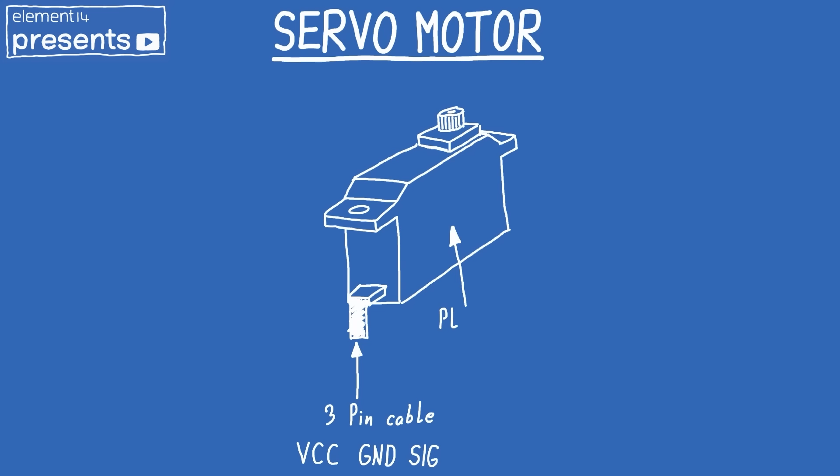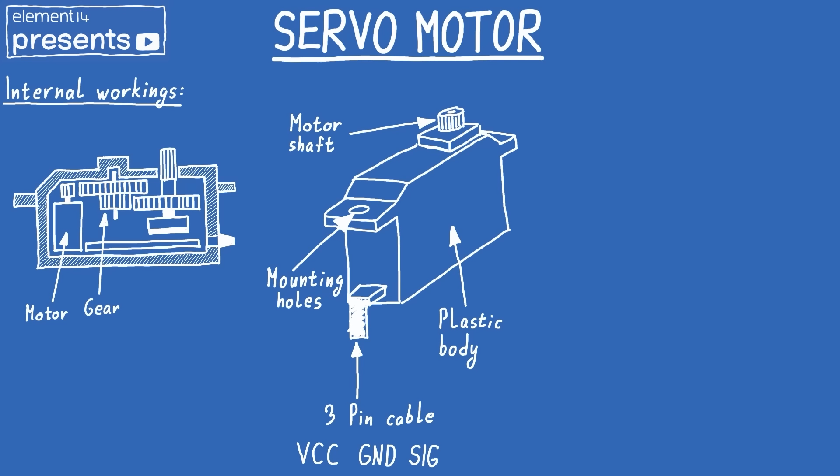So this is a drawing of a standard hobby servo motor that you can see around. It has 3 pins, power, ground and signal. The ones we will be using have a plastic body, 2 mounting holes and a motor shaft. Let's take a look at the inner workings of a servo. So inside it's a normal DC motor with a big gear reduction, and on the output shaft of the gear there is a potentiometer which measures the angle, and a PCB with a controller where we send it the signal and it tries keeping that value.

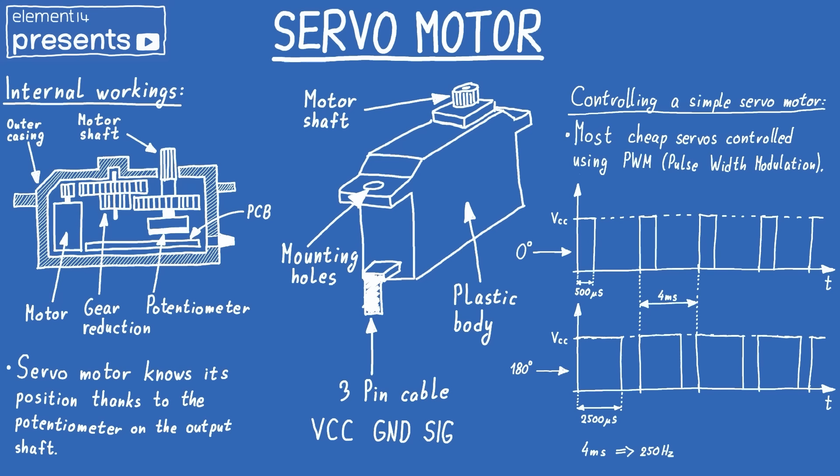Now there are other fancy servos that have RS485 communication or something else, but these servos that we will be using are controlled using what's called PWM or pulse width modulation. So for these servos, we tend to go around 200 to 300 Hz, for example, and for 0 degrees we want a pulse width of 500 microseconds, and for 180 degrees, we want 2500 microseconds, and that's how we control a servo motor.

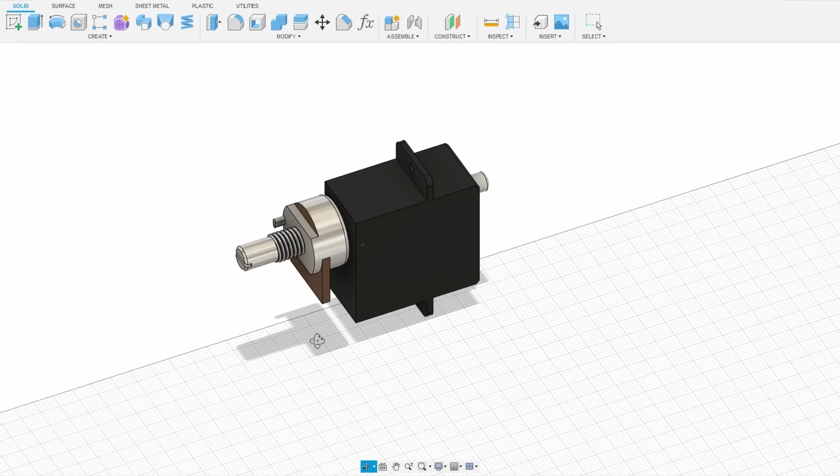Okay, so let's take a look at how we will design the module that holds the servo and the potentiometer. First off, I began by measuring the actual servo and making a model out of it. The next thing we need to do is place the potentiometer, which you can see here. So as mentioned before, we want both the shaft of the motor and the potentiometer to be on the same axis, so that we can use that axis as the joint of the robot.

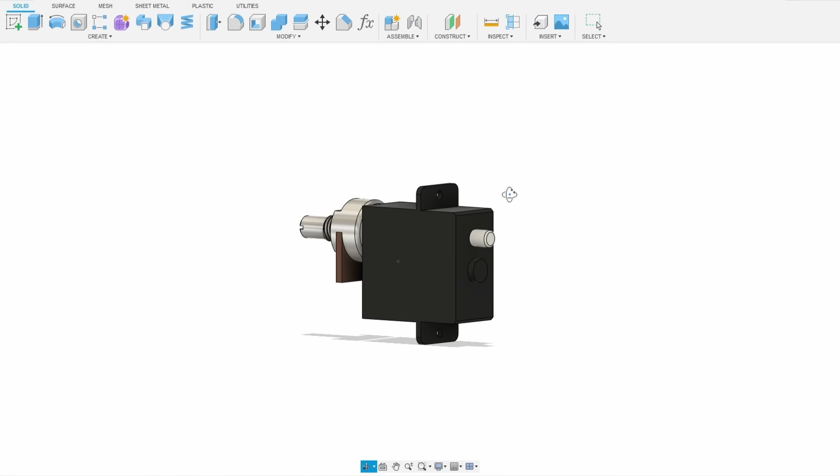What we need to do now is design a 3D printed case that can mount both the servo and the potentiometer. The servo motor mounts using these 2 holes here and here, while the potentiometer mounts just with a nut here. So this is the box I designed that houses both of them. I tried making it as small as possible, but I still wanted it to be aesthetically pleasing, so it's not just a skeleton box but an actual box. And on top of that I added a lid.

Okay, now that you've seen the CAD of the module, let's assemble it. First things first, we need to insert the 4 M3 nuts here and cut the threads here. These threads aren't necessary, but I like cutting them to get a more reliable connection. First thing you want to do is insert your potentiometer. I already soldered the wires. Okay, now that that's done, the next thing is to insert the servo motor.

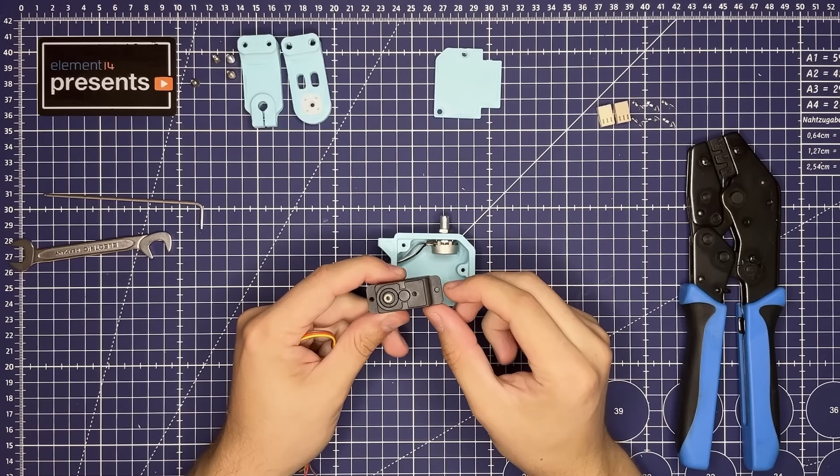The holes on the servo motor are 2.5 millimeters, which is perfect for M3 screws, so I cut the threads again. To insert the servo, you need to fold this cable like this here, a little bit less like this. The next thing we need to do is attach the servo using the 2 screws. Don't tighten it too much so you don't strip the threads. And it's a pretty snug fit, so the servo won't go anywhere.

And the last thing when it comes to the mechanical assembly is to add the cover. Okay, so that's the finished module. Next thing we need to do is crimp the connectors. I'll speed this part up.

Okay, the last thing to do is to actually put the pins into the connectors. This is the board, the final board that we will be using for controlling everything. This side here is for the potentiometers, and this side here is for the servo motor. So the outside pin, as it goes like this, is for the ground pin, which is the black pin here. Then in the middle is the 3.3 volts, which is the gray wire.

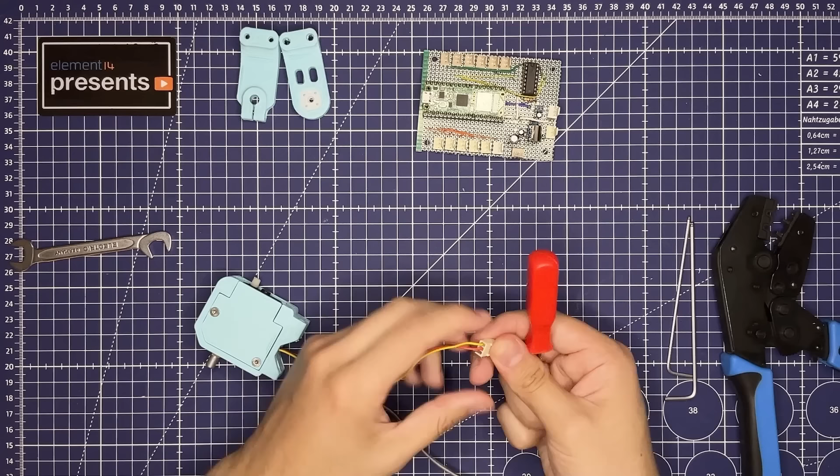And in the end we have the signal wire, which is the middle contact, and in my case that's the white wire. And it clicked into place. That connector is done. Now let's go to the servo connector. The outside pin is again the ground, so that's the brown wire here. That clicked into place. The middle is the power for the servo. There you go. And the last one is the signal wire. And it clicked all into place. So this is a completely finished module now.

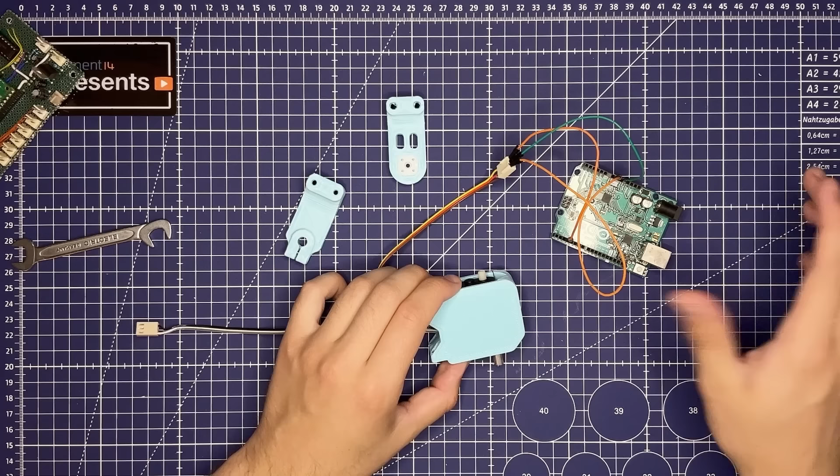Let's take a look at another thing, and that's how do we actually attach these arms to the module. To do that, we actually need to use a microcontroller or a function generator. So there's a program on the Arduino Uno running which just turns the motor to 0 degrees, then to 180, and then back to 90. 180 and then 90. So why is that important? It's important so we actually center the servo motor, so we know that the center point is 90 degrees.

So this is the servo arm. It has the servo plate that came with the servo motor. I just glued it into place. Everything is exactly 24 millimeters wide. They're the same. So the easiest way to do this is place both on the table. Just push the servo arm onto the module. Okay, and that's how you get the arm attached.

And the other one is for the potentiometer. So the potentiometer can't go a full turn, but if you place it like this, you can see that you can get 90 degrees both ways. So that's what we're gonna go. So we're gonna attach it like this. It has a little stop so it doesn't go too far. And to tighten it, you just use a small screw right here, and that would be it. So now if we restart the Arduino, 0, 180, 90. Okay, so you've seen how the segment goes together.

Let's now test it out. Here I have a setup for actually recording the movements. It's calibrating now, finding its minimum and maximum position. And now if we move it in a particular direction, like this, and leave it, after the recording session, it will go ahead and repeat that movement. So if we do this for all of the joints on the robot arm, it will essentially remember what it did, and it will just repeat that.

Let's take another look when it comes to the joint design. So this is the joint we've just tested. We're gonna have 3 of them. So we have the servo motor and the potentiometer on the same axis. But what about the base joint and the last joint? They're kind of different in their construction, and we can't have arms on both sides for the joint to be stable. We need some kind of a bearing assembly to actually hold everything together to keep it stable.

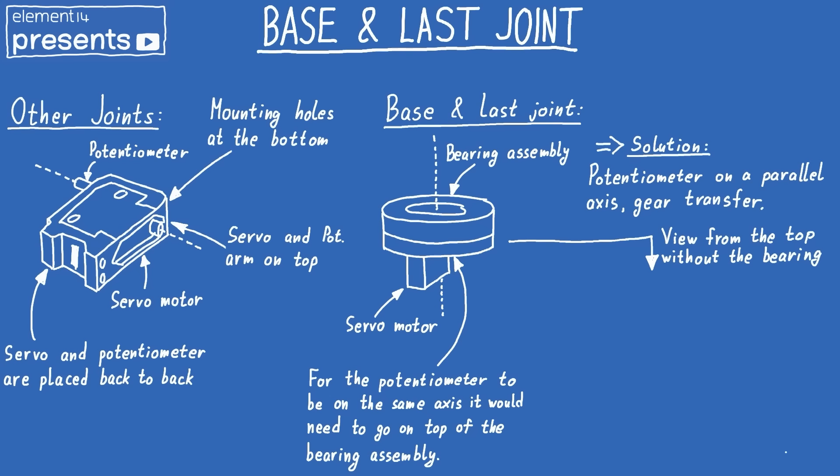So another issue here is that we can't have a potentiometer on the same axis. We need to have it on a parallel axis to the servo motor, and the way to transfer that movement is through gears. Either that, or we need to have a wraparound arm to hold the potentiometer, but then we run into different issues, so we're gonna go this route.

Okay, so now you've seen how the modules look. There's one thing we need to address, and that's the last joint and the base joint. So the thing is, for these joints, especially on our arm, every single axis will be supported both by the motor shaft and the potentiometer shaft. For example, for this arm, the last joint was only constrained by the motor shaft of this servo, and that's too wobbly and it isn't strong.

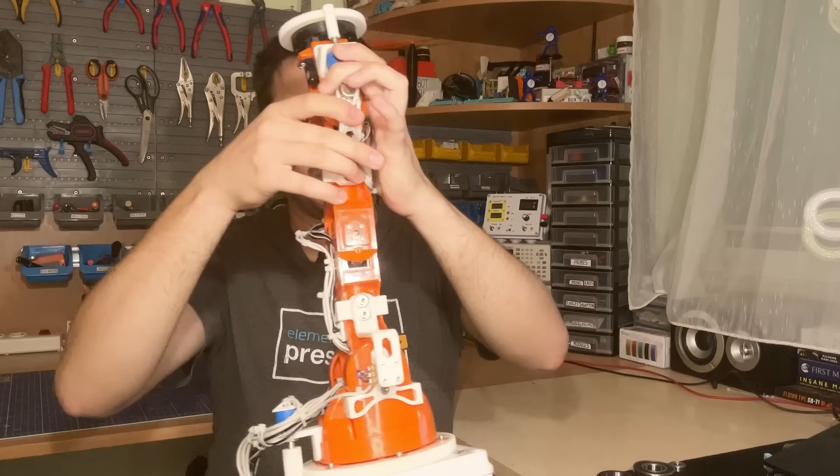I've upgraded this by adding a bearing on the top. That's something I couldn't do down here because I would need a much bigger and more expensive bearing. So the proper way to go would be to use bearings. This is how bearings look.

They come in all different shapes and sizes, but the point of this arm was to keep it as low cost as possible. And again, this isn't a precision robot arm for doing precise movement. This is more for experimenting and learning. So I decided, let's see how hard it would be to actually make our own bearings with something that everyone has seen in their life and has access to, and that's marbles.

So let's first take a look at how a bearing works and go from there. When we look at the bearing, we can see the inner and outer ring. The point of the bearing is that the inner and outer ring can spin at different speeds with minimal friction. So we have the inner and outer ring, you can see the cross sections here, and I'm here describing how a ball bearing works. So it has little metal balls inside in a ball cage that just roll around, and that's what keeps everything constrained.

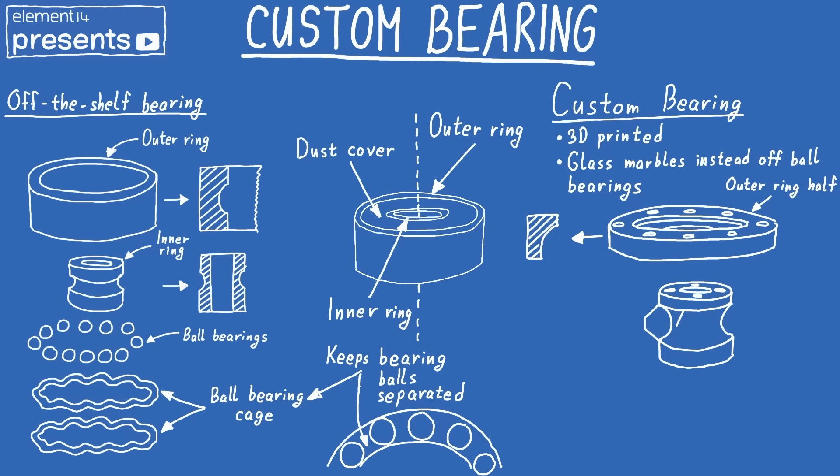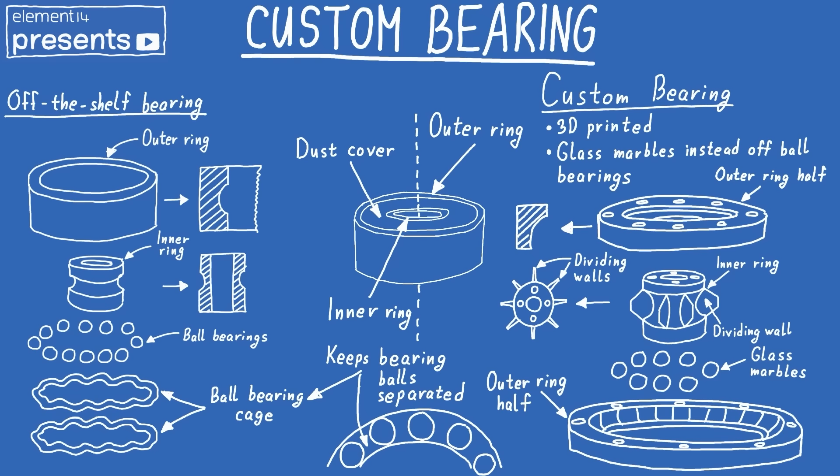For our custom bearing, I want it to be 3D printed, and instead of metal balls, I'll be using marbles since they're cheap and we can find them literally anywhere. But instead of having the cage, my inner ring will have small separating walls so that the marbles don't rub against each other and cause additional friction. And they will be sandwiched between two halves of an outer ring. So that's the idea for my bearing design.

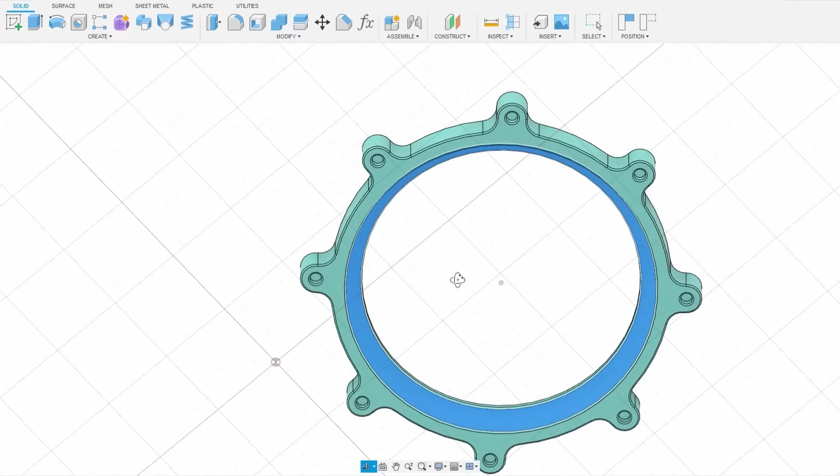Okay, now that you've seen the drawing of the bearing, let's look at the design itself. I'll begin with the part of the outer ring. As you can see, it has this curved surface here, which is a bit over the diameter of the marble itself that we're going to be using. Besides that, we have the lower half. The lower half also has the attachment points to attach the whole robot to a base, as well as attachment points for the servomotor assembly. This is just a hole to insert an M3 nut inside.

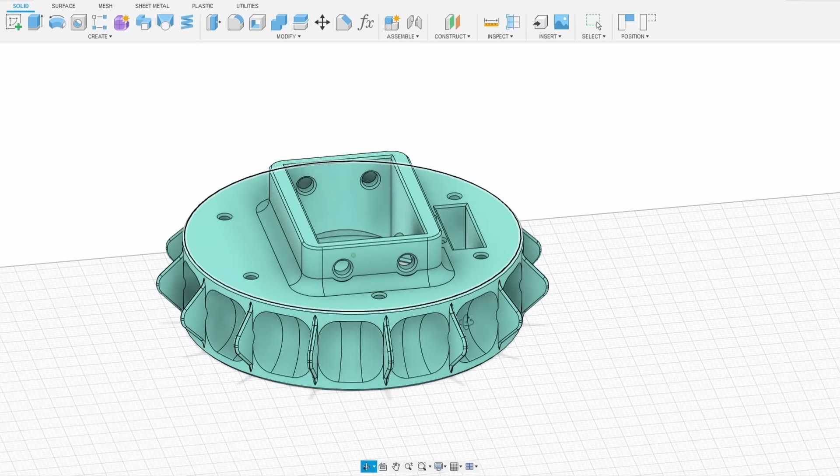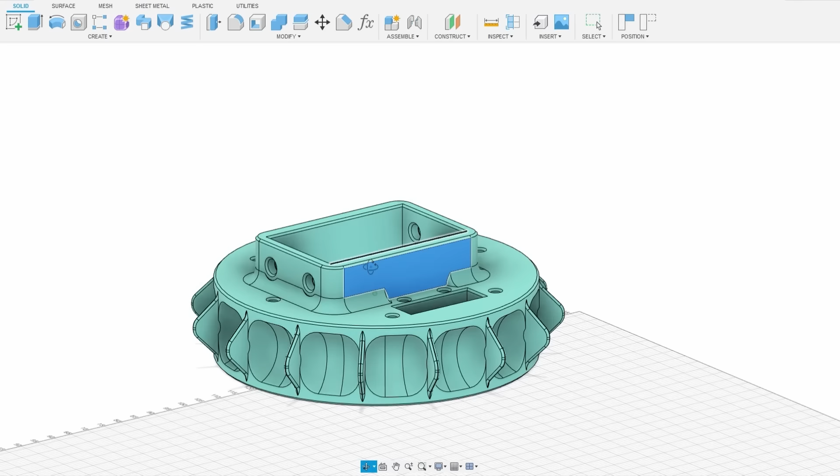And the inner ring is the interesting one. So each one of these sections is supposed to get a marble, and these here are the divider walls. The point of them is to just not let the marbles touch each other, because when marbles start rubbing one against another, that's where you get the friction and the bearing won't work properly. Besides that, on the top of this inner ring, we have the section where the joint that you've already seen screws into place. And on the bottom, we have the holes for attaching the servomotor plate.

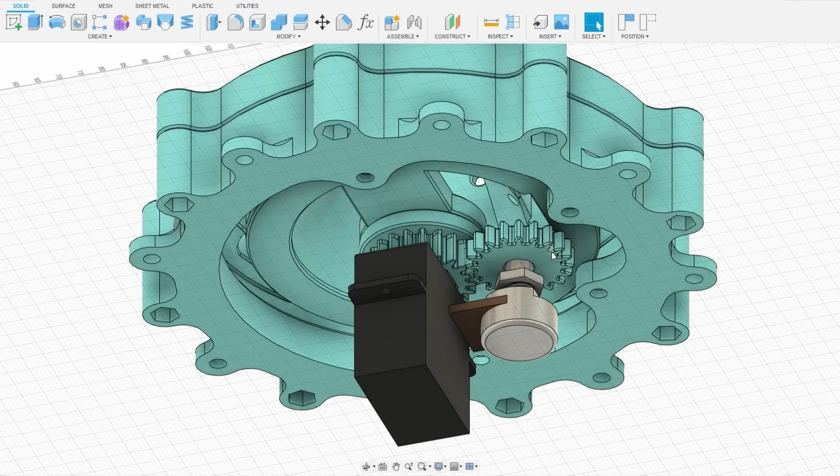So together, this looks like this. And then if we add the servomotor and the potentiometer, they go here like this. Of course, we need a way to attach them to the construction up there. So to do this, the servo is again going through the plate and attaches to the inner ring over this gear, and the potentiometer has the same gear, and all of that is held together by this servo mount. And this is how the whole assembly looks.

The same thing is done for the last joint assembly that you can see. It's just in a much smaller package because we don't need a bearing that big, and we also don't need a hole to run all of the cables through down to the box. Okay, so now that you have seen the concept and the design of the big bearing, let's see how it goes together. So it goes together using these 8 M3 20 screws.

So the first thing is we need to get the base. The base is the one with all of the M3 nuts already inserted. I've already done that off camera, as you can see. These 4 holes are for mounting the servo on the bottom, and these 8 holes are for actually holding the bearing together. And these 8 holes here are for mounting the robot to the box, to a stand, or to whatever else. So the first thing that we need to do is actually put in the bearings, but we start by putting this thing in the middle.

This bearing, as you've seen previously, uses 15 marbles. It was a bit of trial and error to get the tolerances right for the bearing to spin freely. So that's why we have this adapter ring right here.

Okay, so everything is in now. Next goes the spacer. This spacer is 2mm thick. And on top of that we have the holding outer ring, so let's just screw it down. Okay, and just tightening the last screw. And with that, our bearing is complete.

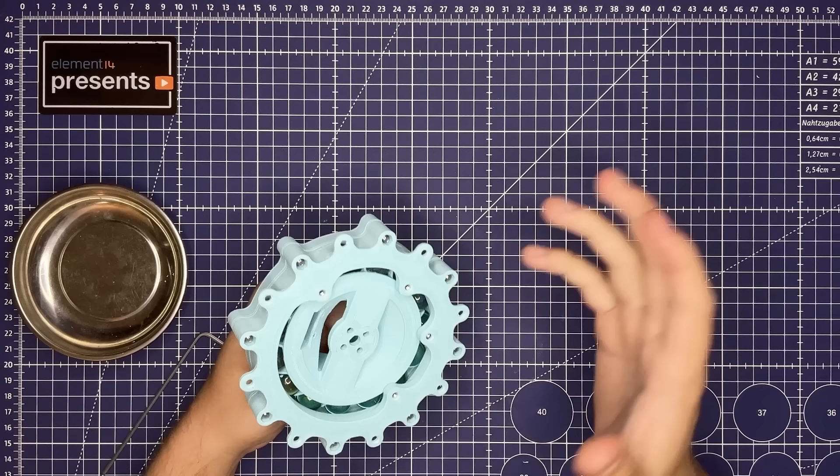As you can see, we can spin it around freely. It doesn't have to spin freely as a normal bearing. The only thing it's supposed to do is when it's loaded to actually allow the servo to spin the whole base of the robot, which it will.

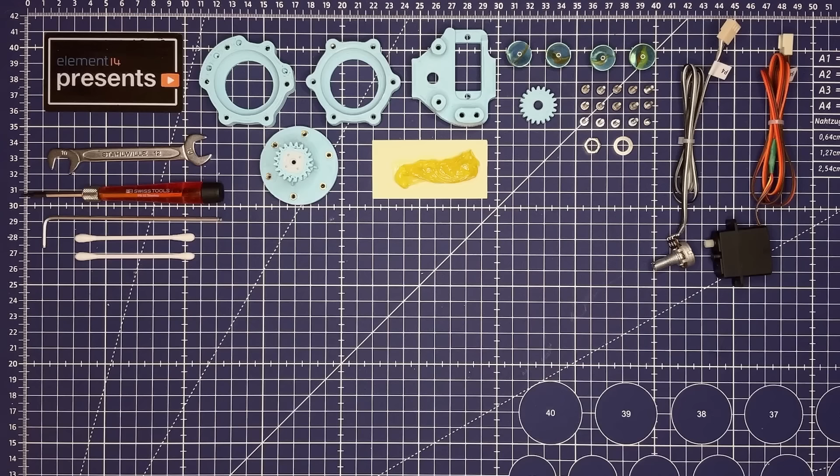You've seen how to assemble the middle modules, so now let's assemble the top module. One thing to note here is that I will be using some grease. It's not mandatory, but due to the bad tolerances of generally 3D printing and the marbles, I found that it works much better if you actually use some grease. So let's start by applying some grease using Q-tips. This is just some random automotive grease. Anything will work pretty much.

Okay, so now we're done with that. Now it's time to assemble it. This here is the inner ring, let's call it that, and it's also the mounting plate for our gripper and things like that. This is the top plate, so to assemble it, this goes over here like this. And now we need to put the marbles into place. We don't need to put grease on the marbles, they'll get grease when we push them in. The tolerances are pretty tight, so they will pretty much click into place, as you will hear now.

There you go. Next thing to do is to actually put the other part of the outer ring to encase the whole bearing. So just make sure to align these holes. The top part already has inserted M3 nuts here. So align it like that.

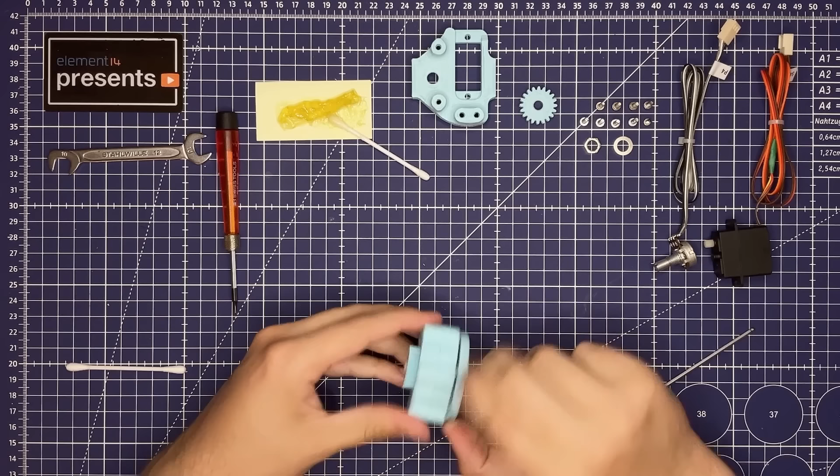Okay, now with that assembled, just spin the bearing around to get the grease on the marbles, and you will see that it will start spinning pretty freely. And also when you put in the motor, it will straighten the axis and make it spin even more easily. Okay, we can leave that to the side for now.

Now we need to attach the potentiometer and the servo motor to the servo mount. Let's first do the servo. Okay. Make sure that the top of the potentiometer and the gear align. So let's just lift it up a bit, like so. Yeah, that's pretty good. And because the tolerances are pretty tight here, make sure that the gear doesn't touch any of the pillars here. Okay, now we need to use the Arduino Uno as we did for the previous section.

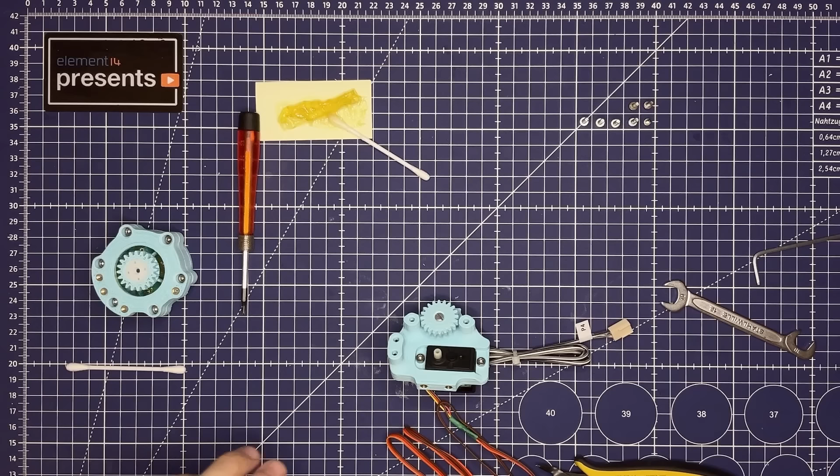We need to center the servo. So let's connect it up real quick. 0, 180, and that's 90 degrees now. Okay, so what we need to do now is actually center this potentiometer. As you can see, we can just put it at something like this. All we need to make sure is that it has 90 degrees this way, which it does, and 90 degrees this way, which it does. Okay, so we leave the potentiometer like this.

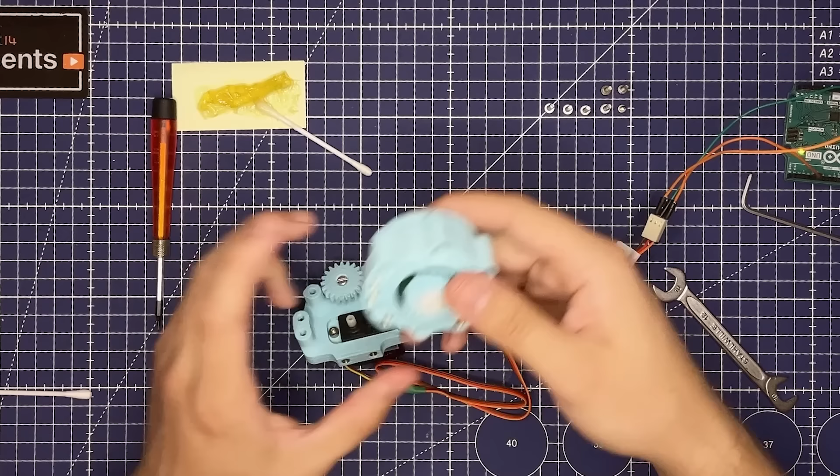Now, the only thing is that we need to align these 4 holes with these pillars here, so we can actually screw it down later. And just get the teething as best as you can. But, I mean, the potentiometer has much more than 180 degree travel, so it won't make a big difference. Okay, and now we just need one last screw, and that's the screw that attaches the servo plate to the servo motor itself. And with that, our top joint is complete.

So that would be it for the whole assembly. The only thing to do now is to actually assemble all of the modules together. They are easily assembled using these holes here, or for example, these holes here on other joint pieces.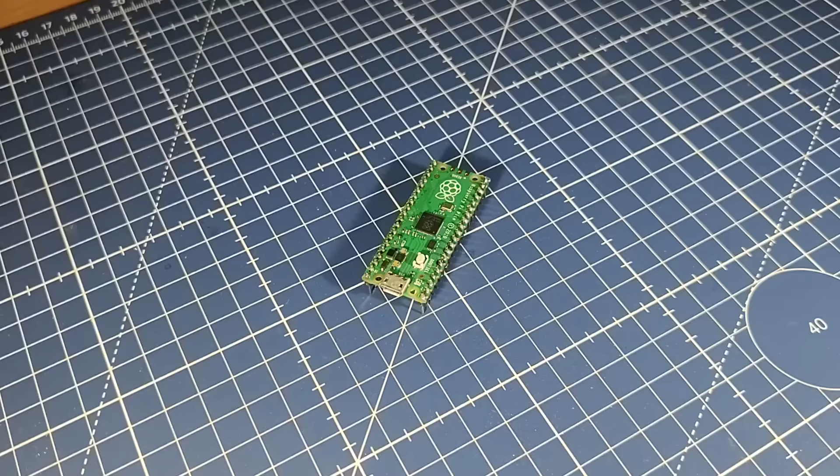That would cover all of the mechanical aspects of the build. Now let's get to the electronics. For now at least, I will be making a low-level controller, so just a hardware controller to run all of the servos. So I won't be doing any fancy stuff like direct or inverse kinematics, things like that. All I want to do is send G-code-like commands to a microcontroller and for it to actually move the servos to the actual angles. I will be going with a Raspberry Pi Pico W microcontroller, so the wireless one.

It's the same microcontroller as the Pico. I just want to have the wireless capability maybe for some future upgrades. Let's take a look at the final schematic. So for the most part, it's just connecting all of the servo motors here on the left to the Pico, as well as all of the potentiometers.

One thing with the Pico is that it only has 3 ADC pins on GPIO 26, 27 and 28, and we want to connect 6 potentiometers to that. So to do that, we're gonna use a multiplexer, the CD4053B by Texas Instruments. So we can literally switch between 2 potentiometers on one single ADC pin.

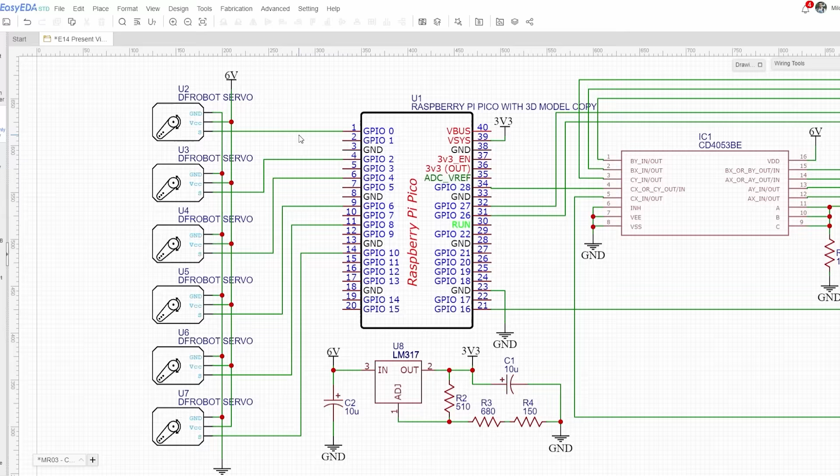So we can do that in software, and for the reading speeds that we're aiming for, this is more than good enough. The servo motors already require power, the 6 volts, and they also require the signal wire. The signal wire needs to be connected to pins 0, 2, 4, 6, 8 and 10. This is because we are using hardware PWM on the Pico, and the PWM on the Pico is separated into slices, and we can control each slice independently. One slice is, for example, GPIO 0 and 1, so we can only use one of those pins the way I did it with the library.

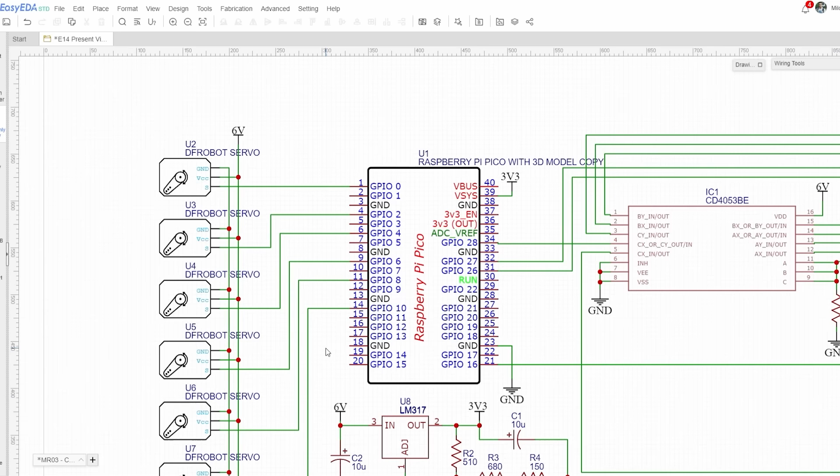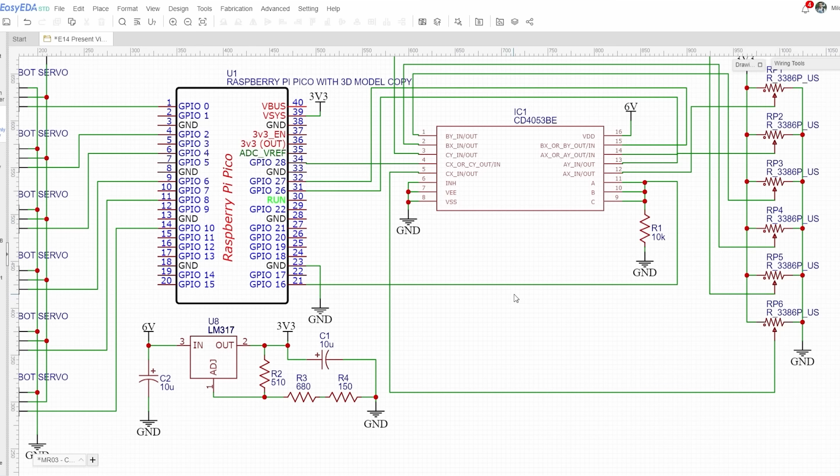So this is how I connected all of the motors. Besides that, we have the power supply. I'm just using an adjustable linear regulator to drop the 6 volts to 3.3 volts. So this would be the end of the schematic, besides me making a mistake and not reading the datasheet, because this was an error I was actually looking for a while and why it didn't work. So this doesn't work, and the simple way to fix this is by adding this piece of circuitry.

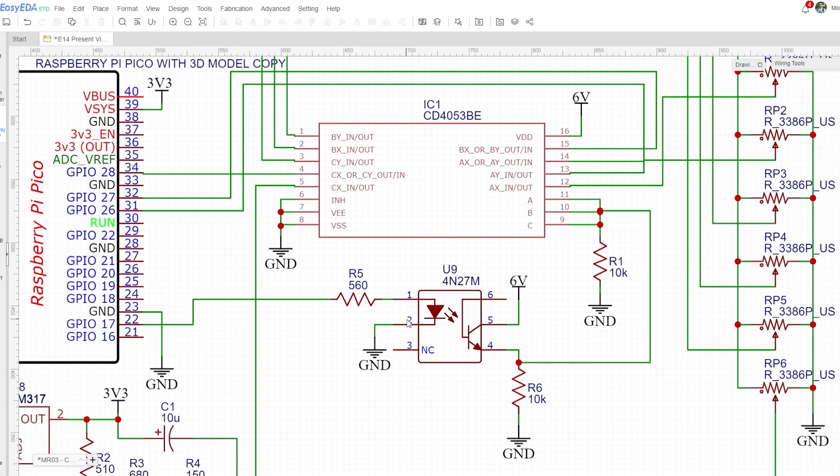If you look at the datasheet for the CD4053BE, the voltage at which we can actually trigger the multiplexer for a 5 volt power supply is over 3.5 volts. So actually trying to do that when we are powered by 6 volts, nothing happened. So we need to step up those 3.3 volts to 6 volts, because we have 6 volts already, to be able to actually trigger the multiplexer. Let's solder this board now and test the robot out.

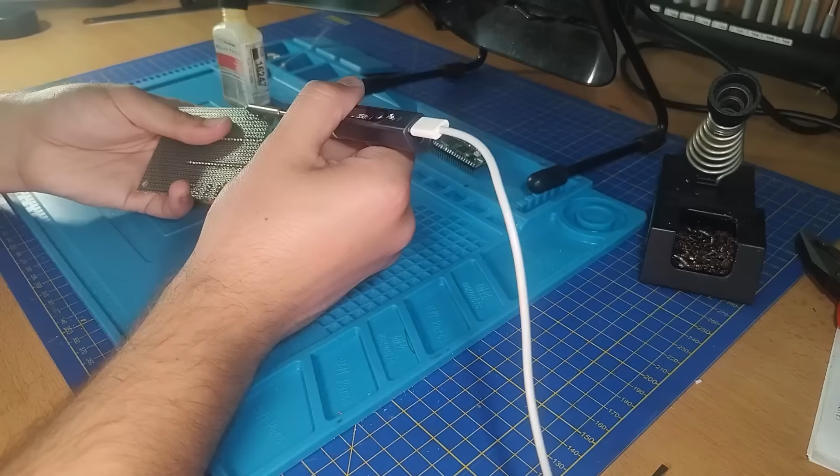Before we test the robot arm, we need to first program it, of course. Let's take a look at the code I will be using. So we will be using 2 libraries, not 3. My first test included the servo library, but I found it didn't work too well with this many servos on the Pico for some reason. So I opted instead to use the RP2040 PWM library, and I'm also going to use the Pico timer interrupt library, as you will see. These are all of the pins I will be using, and these are some of the parameters that you can actually configure for the robot itself, like the minimum pulse width and maximum pulse width for the servos, which is in the datasheets from 500 microseconds to 2500 microseconds for 180 degrees.

So okay, let's jump to the setup function first. The setup function is pretty simple. We just start up the serial, define all of the pins, turn off the relay, which is important so the arm doesn't start going randomly. Make sure that it's actually off, configure the ADC, configure all of the PWM channels, and configure all of the timers. In the loop function, the only thing we are doing is checking if there is some command coming from the serial, and if there is, we are decoding the message. So let's look at that now.

Okay, so this is just the check serial function. It's the default function for just checking if there's some data on the serial data line. So this is when we type into the COM port. That's how we communicate with the Pico. And let's go now to the decode serial message. These are all of the commands I plan on. Some of them I already added, and some of them I will be adding. So for example, C0 is the main command. That's the stop all command. If we see that the robot arm is trying to do something that it probably shouldn't be doing, we just type C0 and it kills the servo and all of the PWM signals, so the robot just stops.

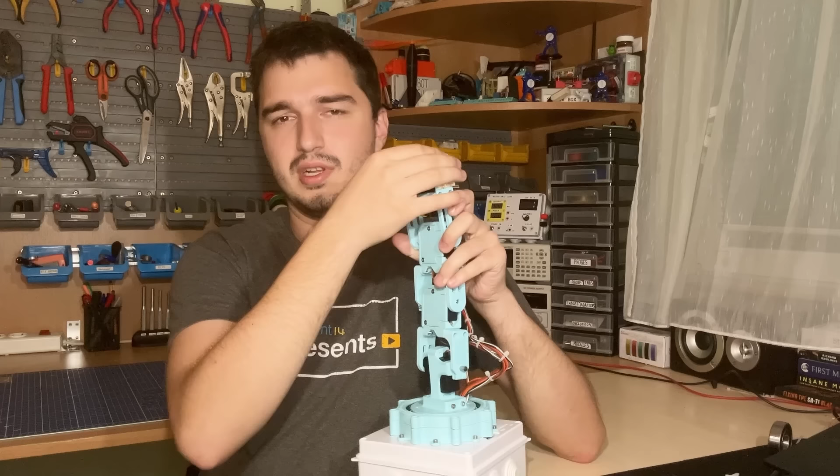I'm really happy with how the arm turned out, but as you can see, one of the segments is a bit different. So during the testing, these segments with these servos turned out to be too weak for an arm this size. The arm would have to be even smaller and lighter, and with this heavy top bearing here, this motor especially couldn't handle that.

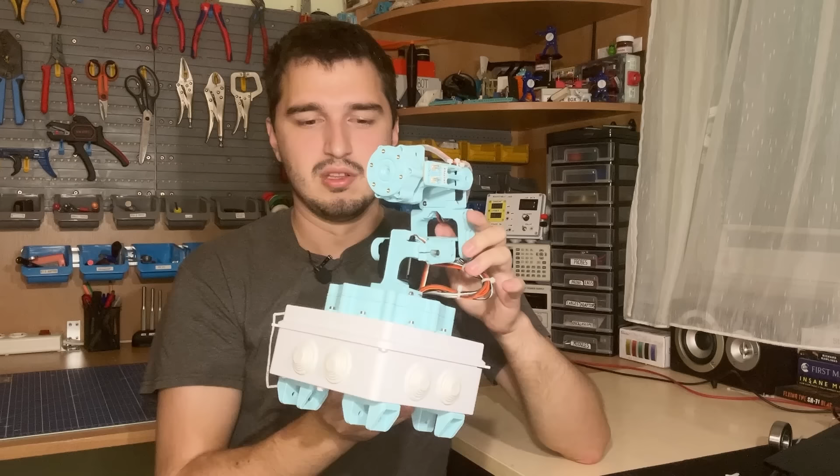So I made a little mount for the standard size servo that actually has a built-in analog feedback, so it worked out pretty good. But honestly, as you will see now during testing, this joint right here could also benefit from a motor swap like this one here, and it wouldn't add too much additional cost, but we could do something about that later. So let's go on and test this robot arm to finish up.

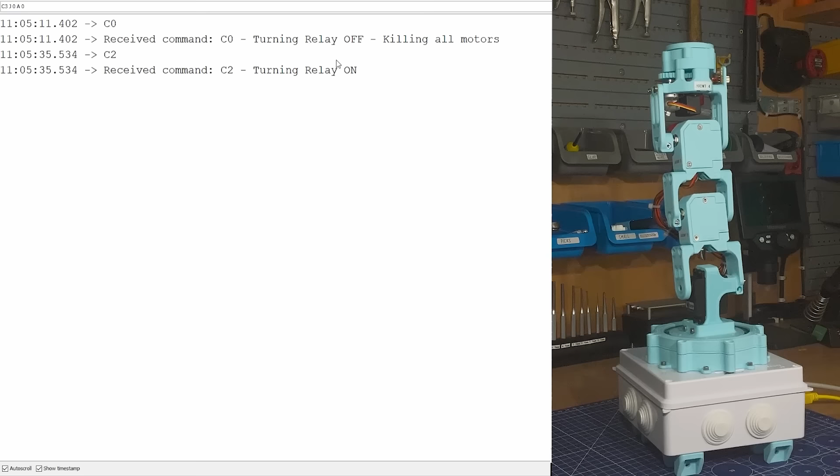So let's just activate the system. So for example, if we want to turn the base by 90 degrees, you can see how slowly it turns now. Or if we go 180. This also relieves a bit of the pressure from some of the motors, since they won't have to handle all of the inertia caused by the upper segments.

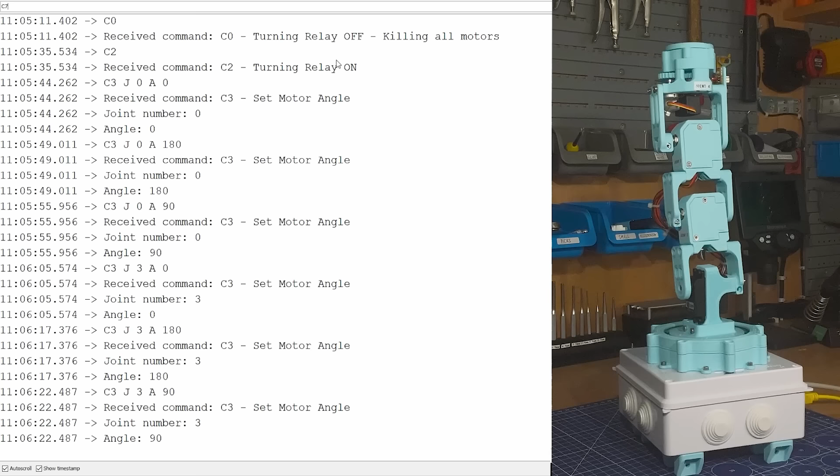So for example, if we look at joint number 3 and put it to 0, you can see that joint 2 can handle that, because the arm didn't just swing it fast, so there wasn't a lot of inertia. Or if we switch it to the other side, you can see the same thing, it works great. Okay, it also works when we do all of the angles at once. So for example, let's do the pose that we did previously. And as you see, it just goes way smoother than it would without the ramp limiter.

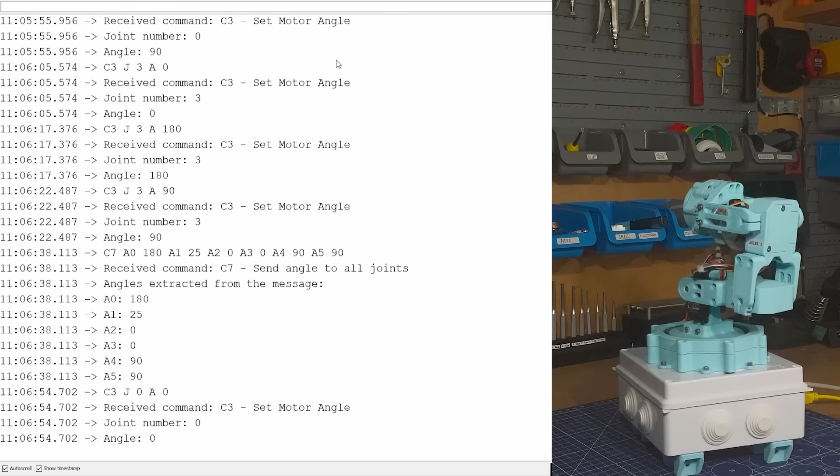I will be upgrading the second joint as well to a bigger motor, but for now, as you can see, it can still happen, but it works much better. I need to upgrade to that motor as well.

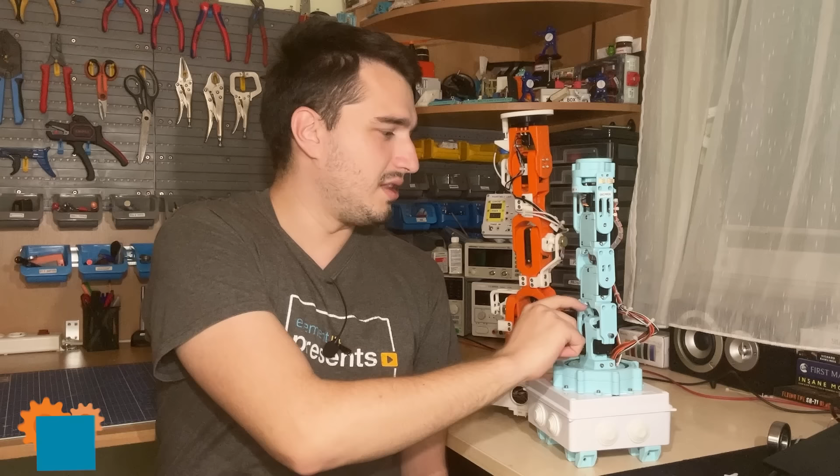This arm is not up there yet, like this one here, but I'm gonna continue working on it. Gonna replace this motor here with one like this here, and gonna finish up the software so that the recording and playback functions work great. My next goal for now is to add this attachment to it, which is a Sharpie mount for the top plate here. So I use the end of the robot arm in recording mode and write something so that the robot can repeat it. I can then experiment with adding grippers and maybe even adding a Raspberry Pi and running ROS and doing some direct and inverse kinematics.